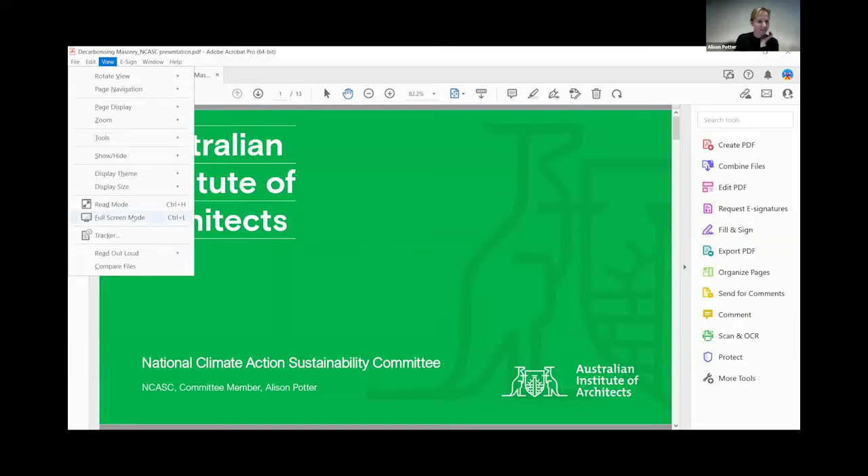Great, excellent. So thanks for the introduction. I'm principal at Hassell Architecture, but I have pretty broad experience across a lot of different sectors, and I'm really passionate about environmentally responsive regenerative design, which has really driven my interest in joining the AIA National Climate Action and Sustainability Committee, but also being involved in a number of other policies, design review panels across Australia, and then into the technical working group, advising into the commercial energy efficiency for 2025.

So for those who don't know, the Climate Action Sustainability Committee actually does a number of different things, working with the national committee, but also working into each of the states' committee chapters. We're keen that there is a very quick transition into improving our built environment. We're looking to support 100% clean, renewable energy futures, and a quick transition of the sector to 100% renewables. We're also looking at identifying ways that our members in the architecture community can promote through their projects circular economy, supply chains and business practices. Really key to our position and role is how we work and collaborate with industry stakeholders, including the ABCB and other members across the whole built environment industry.

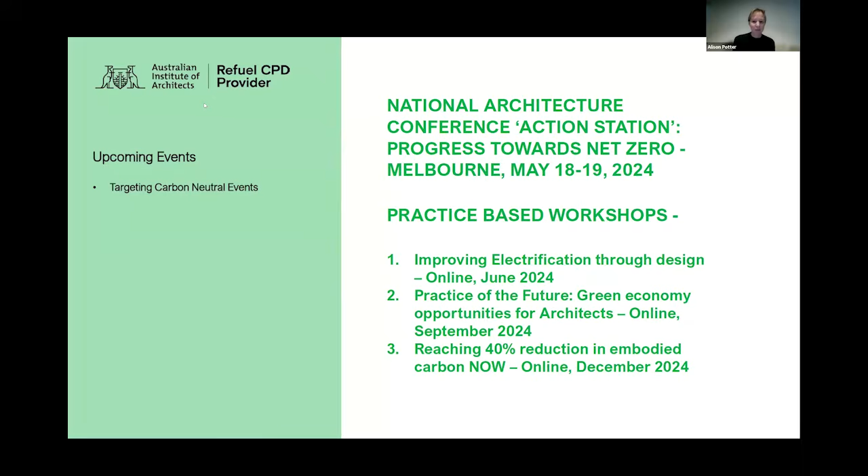Just lastly, we do have a number of webinars that we are putting out to our members. We've got one coming up around improving electrification through design, another one around practice of the future — what does that look like, what does this transition look like for architects in September 2024? And towards the end of the year, we've got an embodied carbon focus session on how we get to these high levels of reduction quickly.

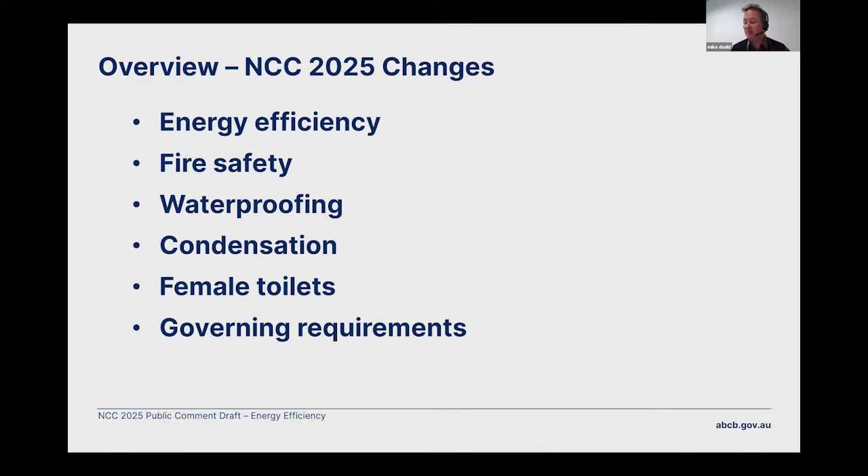Just noting that if adopted, these changes would become part of a revised National Construction Code, which sets the minimum standards for buildings. In other words, the changes would be raising the bar for the worst buildings you can legally build in Australia. So it's important stuff.

I guess the fewer electrons of demand we're adding to the grid by making our buildings more energy efficient, or these buildings coming online potentially producing some of their own power, the overall task of decarbonising the electricity grid for all existing buildings is made that little bit easier with every efficient building we can add to it, especially if it's replacing an inefficient building.

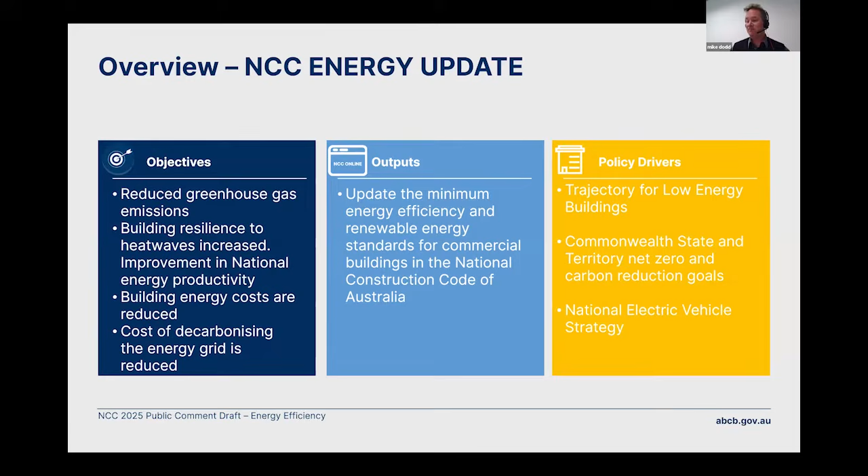Okay, I'm going to move into the methodology of how we came up with these proposals, and the way that we've come up with these new proposals that hopefully some of you had a chance to see, which I'll go into more detail in.

So this is the scope of what we're talking about in terms of commercial buildings, class 3 and 5 to 9 buildings, and the common areas of class 2 buildings. That's apartment buildings' common areas, not the sole occupancy units or apartments themselves, hotels, hostels, offices, schools, essentially all classes of buildings other than residential.

The process that we followed was essentially a large energy modelling exercise where we took buildings that complied with the provisions as they currently stand, but were also reflective of common building designs. And we looked at how we could improve the energy efficiency of those buildings in the key areas that we regulate through the National Construction Code. We did that across all 8 climate zones.

Essentially, we began with a cost-benefit exercise, asking how far can we increase the efficiency of a building while it's still cost-effective. So that's the process. The individual DTS interventions were modelled at a building level.

We also looked, as we were doing this cost-benefit analysis, to make sure that we didn't push so far, even if it was cost-effective, and ended up with only one supplier able to meet the requirements in the NCC. We also had to make sure that what we were proposing would be buildable, that you could actually produce a building able to meet the requirements. And of course, we had to make sure you produced a building that met the other requirements of the National Construction Code, whether it be impacts to do with condensation, fire safety, and structural reliability and the like.

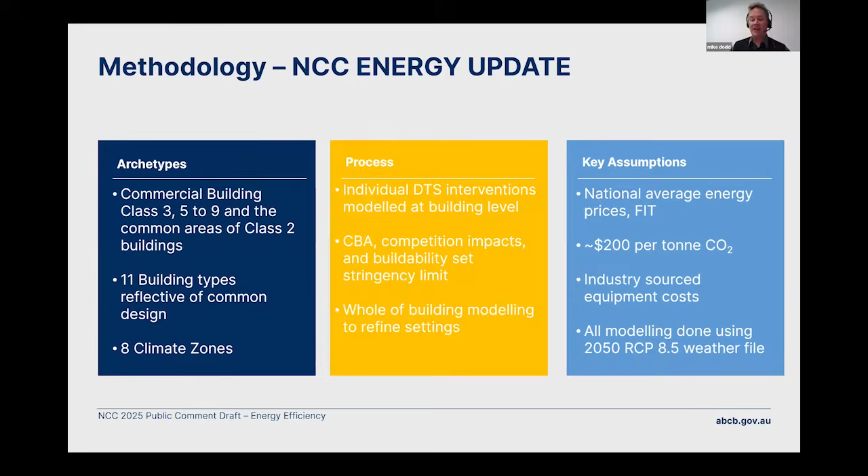So we did a small and a large office, a small and a large hospital, a small and a large retail - so a big box retail and a strip retail - a large hotel, a small hotel or motel, a classroom, and an intermediate size office altogether.

I guess the most difficult one to model is something like a 9B community centre. We used a school for that, but there are many different types of 9B buildings. There's many different types of hotels and hostels, and more modelling is always good, but we were limited in time and scope, and believe the amount we did gave us enough to produce a defensible set of proposals.

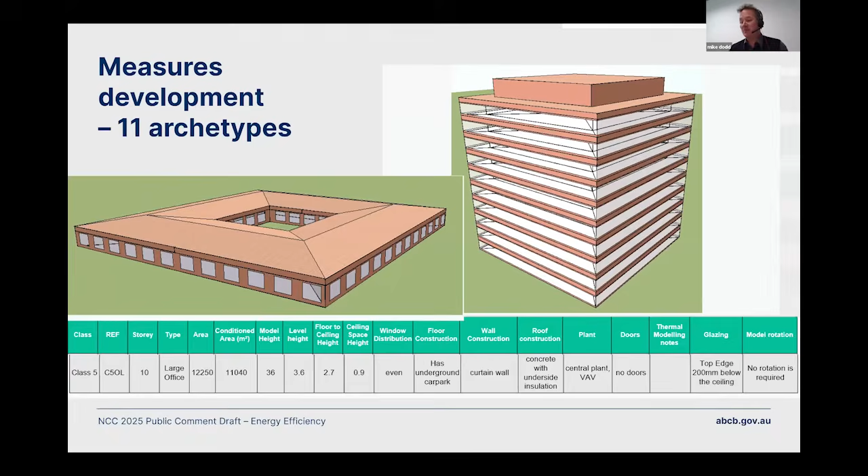In terms of methodology, we investigated three distinct sets of stringency. Option 1 was a minimum cost-effective approach, taking into account buildability and unintended consequences across the code - essentially looking at the 2022 code and how far you can push that while maintaining cost effectiveness.

We then took those measures and added renewable energy systems - on-site PV essentially being the most cost effective - to see what that looked like as a set of provisions. Again, that was done as a cost benefit analysis: how much cost effective PV can you add to a building?

And finally, we looked at a least cost pathway to net zero ready buildings. This wasn't a cost benefit analysis - it was about what we can do to get these buildings to net zero through the national code as a minimum pathway.

We took those options and ran them through a regulation impact assessment. Off the back of that, it was the decision of building ministers and the board that we go to public comment on the net zero ready option. So what you'll see in the code is a net zero ready option for new commercial buildings.

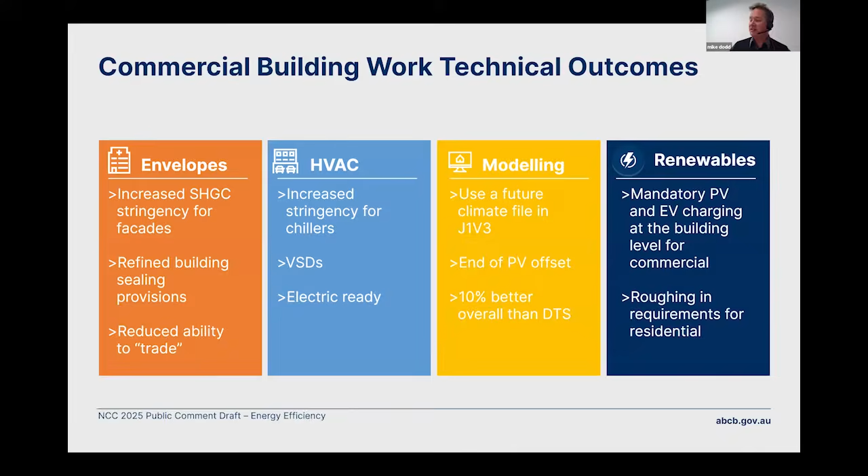I'm going to jump in and go into more detail - but first, I think I've got a slide on.

So I mentioned the regulation impact assessment. It's a mandatory approach that all governments must take when introducing new regulations, to look at the overall benefits. They're relatively substantial with what we're proposing for NCC 2025.

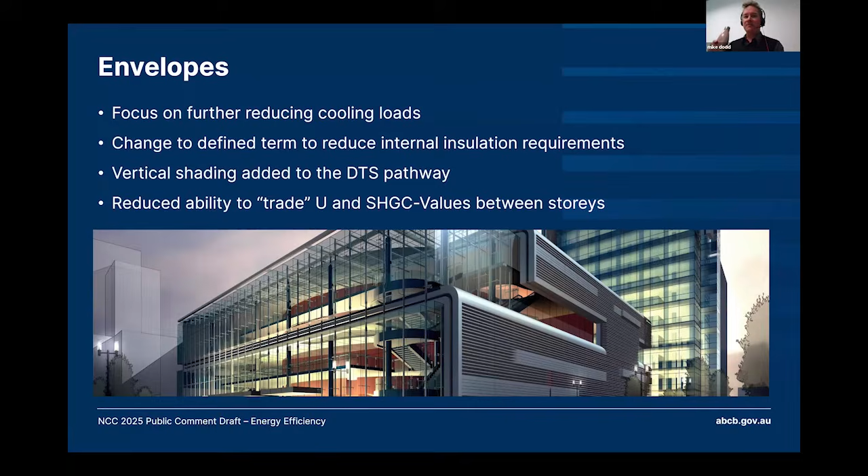One of the comments we got from 2019 was around these uniform across the country solar admittance requirements, and that it doesn't seem to be very responsive to the actual climate that you're in. The response to that was at the time and remains that as you increase energy efficiency, keeping the sun out is important, especially for daytime operating buildings because of cooling loads. But as you get more energy efficient, it becomes more uniform across the entire country.

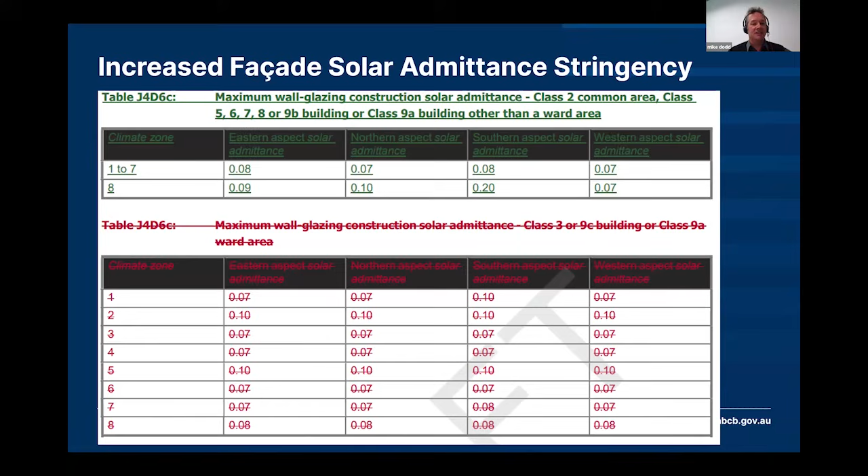And so the DTS becomes blunter the more stringent it becomes. There's still room for nuance within design, especially if you're following a verification method, and we still retain that ability to trade.

Okay, so I mentioned before, at the moment, we're proposing a change to the definition of envelope. And this is a key thing that we found that in the 2019 changes, or even before that, you're required to insulate between a conditioned and unconditioned space internally, even if the unconditioned space adjacent to the conditioned space had its temperature determined by the building's air conditioning system, or wasn't really affected by external ambient conditions.

This meant that we were requiring people to install insulation where it wasn't necessary, wasn't having any effect, and they were also in some cases able to use that internal insulation to trade with the external insulation and reduce the external part of the facades. So we found that as we're making the building more efficient overall, it was important to only allow that trading when insulation was necessary within the building.

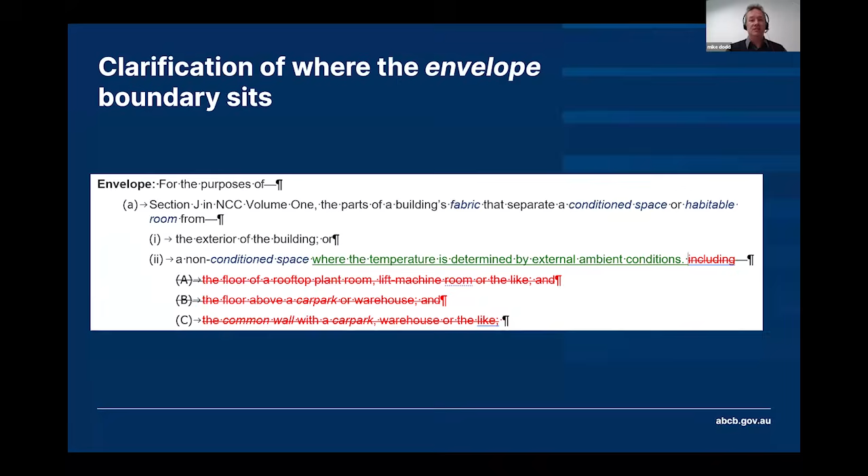Right, so, and I'll talk about those case studies and when they should become available, hopefully in the coming weeks.

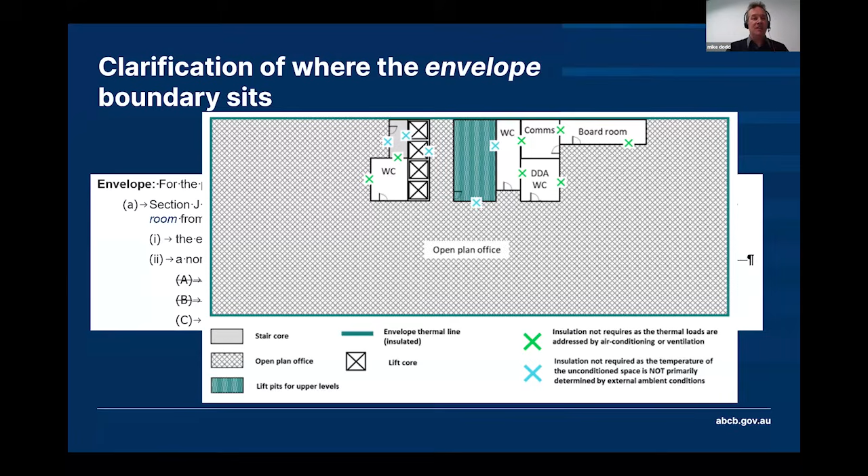Okay, staying with facades, I mentioned we have introduced vertical shading as a deemed to satisfy. So presently, if you have a vertical shade on your building, you can claim it as a device if it meets the requirement as a shading device, but it doesn't give you necessarily the benefit that you might expect from a vertical shading projection. So this is DTS, and currently you'd have to do a performance solution, such as a J1V3, to get the full benefit from your vertical shading.

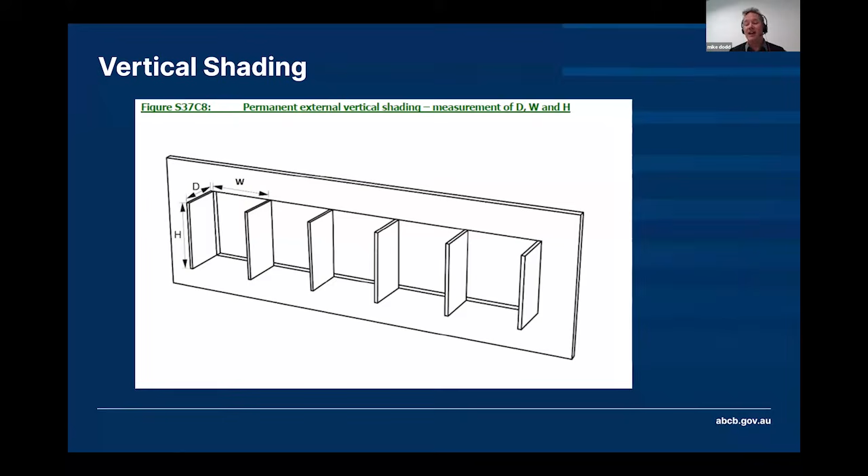But introducing this as an option, we're hoping to encourage vertical shading, that especially on a western aspect or an eastern aspect could be very effective in stopping solar gain coming into a building.

And finally, this idea of the decreased ability to trade within the building envelope. So currently, you can trade the total system U value of your facade between different stories. So between the first story and the 10th story, you could have a smaller amount of glazing on a lower story and a higher amount of glazing on an upper story.

Now, if you were doing that within a J1V3 or the NABERS pathway, for example, within the code, you'd also have to make sure that that space met comfort requirements, such as using the predicted mean vote. From a deemed to satisfy pathway, there isn't that comfort requirement backup, which essentially is serving as an envelope protection to protect occupants.

And so we're proposing to remove that ability to trade between different stories. You can still trade between different aspects on the same story, and you can still trade within a story between glazing in terms of meeting the overall requirement, so you can have within a story more glazing in one section and less in another, as long as it meets the overall total system U value. But yes, not between different stories.

And I'm interested in your thoughts on this. It does limit design potentially. I guess the question is whether you feel it's a warranted change in terms of protection of the building occupants. Yes, and it's carried across both method 1 and method 2. So yeah, you can still trade between different aspects, but only within the same story, as proposed.

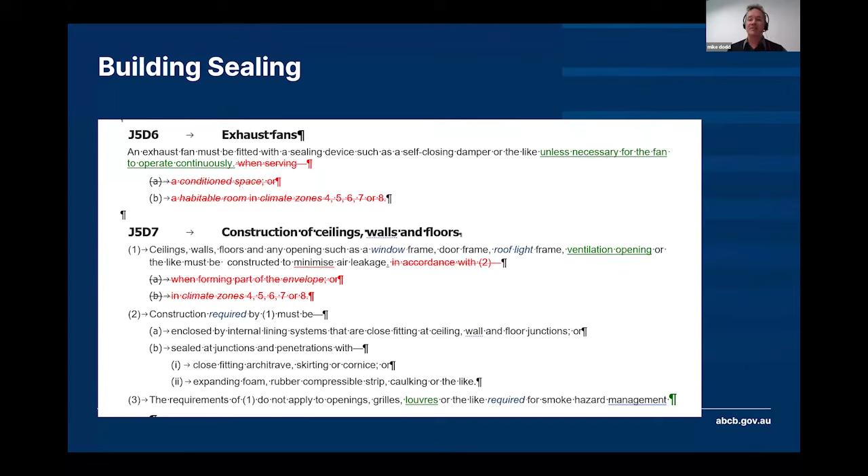We've also made some minor changes through Part J5 to the building sealing provisions. These still remain qualitative in terms of application. The building envelope still needs to be sealed up, but there's some changes there in terms of wording to try and clarify when sealing is or isn't required. I didn't want to go into a great deal of detail. These are qualitative changes trying to improve the clarity of the NCC. So they're changes for building envelopes.

I'm just going to go through some of the other key changes in the time I have remaining, and then I'll hopefully open up to questions.

So I mentioned the verification methods and the performance requirement have also undergone some changes. So J1P1 is the energy efficiency performance requirement for commercial buildings. This was quantified in 2019. It has a kilojoules of energy per square meter per hour of operation target that was introduced in 2019 to give you, I guess, a pure performance solution possibility within the NCC. The stringency of these figures has been increased, and a carbon metric has been added to the performance requirement, and it reflects a near zero energy performance.

It's not exactly at zero because we know that the grid will not be fully decarbonized for a number of years, and actually getting all building classifications to a net zero target is going to be difficult depending on the building form, its typology, its size, and so forth. But it does reflect a near net zero level of performance.

We've updated the NABERS pathway, J1V1, to reflect that. So there's a higher NABERS commitment agreement level of 6 stars that varies between building types. Thank you, Erica. So I think it's 6 stars for office buildings and lower for other building classifications. So class 3s, class 6s, and class 2 common areas can use the NABERS pathway presently.

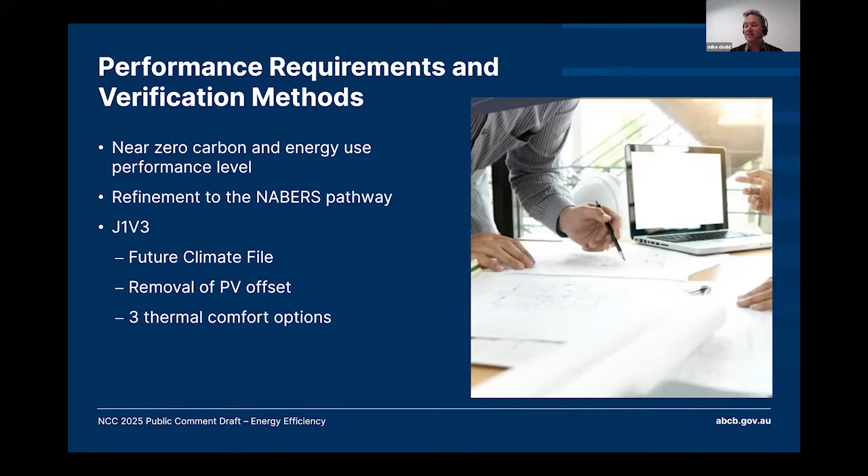And I mentioned upfront the changes to the J1V3 pathway in terms of future climate, especially. The Green Star pathway remains unchanged, and the J1V4 pathway in terms of building sealing verification using a blower door test remains unchanged. There is a small change to J1V5 verification using a reference building for class 2 apartment buildings, so occupancy units. We've extended the requirement to meet the cooling load to climate zone 6 and to meet the heating load cap in climate zone 2. So a slight expansion of the requirements in those climate zones.

I touched high level on the air conditioning and electric ready requirements earlier on in terms of the key headline changes. There's a new metric for chillers we're proposing to introduce called a climate specific part load value. The main intent of this change is to make chiller selection more fit for purpose, both in terms of the technology that you use and the load and the sizing of that equipment. So it's trying to drive you towards good design as best as we can through the National Construction Code.

Fans and pumps will require variable speed operation. It's incredibly cost effective in most cases to introduce variable speed operation, and so you'll see that as a requirement. There's other changes for HVAC equipment to do with how controls are specified, and some changes to do with economy cycles in terms of when they are going to be required going forward.

But perhaps one of the biggest changes overall, not just for air conditioning equipment, relates to future electrification. If a building is dual fuel in terms of using gas for its space heating or heated water, either for sanitary domestic hot water use, or for hydronic heating, or for heating of pool and spa water, it will be required to make it easier or more straightforward for that building to replace that gas equipment with electric equipment in the future.

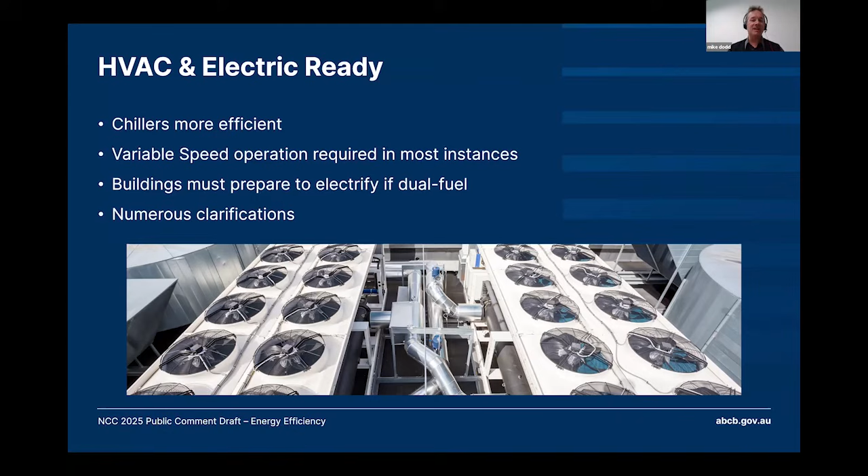That means that the building needs to have physical space in terms of where that equipment will go. It needs to have electrical capacity in terms of its supply from the grid. It needs to have switchboard space so that that equipment can be plugged into the building's main switchboard or its various distribution boards. And specifically for the heated hot water loop, it needs to have its hot water loops designed to be able to use 50-degree Celsius water, which is not the optimum, but it's a temperature that works well with heat pump technology. So there's a number of things that your building must do if it uses gas upfront to make sure that it can electrify in the future.

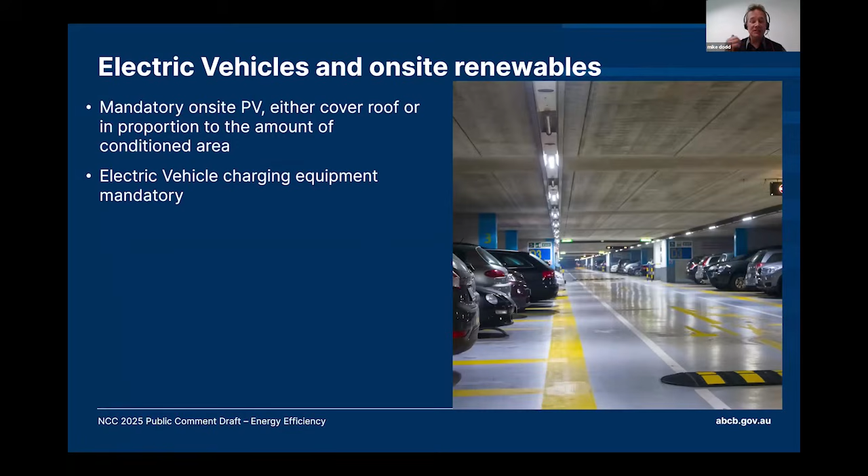Okay, another key change that I'm going to go through, electric vehicles and on-site renewables. I'll start with the PV provisions. So high level, we're proposing that all new commercial buildings, unless they're heavily shaded or have other exemptions, install solar PV if they're following the deemed to satisfy pathway, and all buildings have electric vehicle charging. I guess that's the headline, as I mentioned before. So what does that look like?

So that requirement is built into the performance requirement. So in terms of J1P1, as I mentioned before, it's a net target. So it will be inclusive of on-site PV. So those quite tight greenhouse gas emission and kilojoules per square meter targets can be done inclusive of on-site PV. So we're looking at a building which is near zero, both in terms of carbon of its energy sources and energy use, producing and using as much energy on site as it's drawing from the grid.

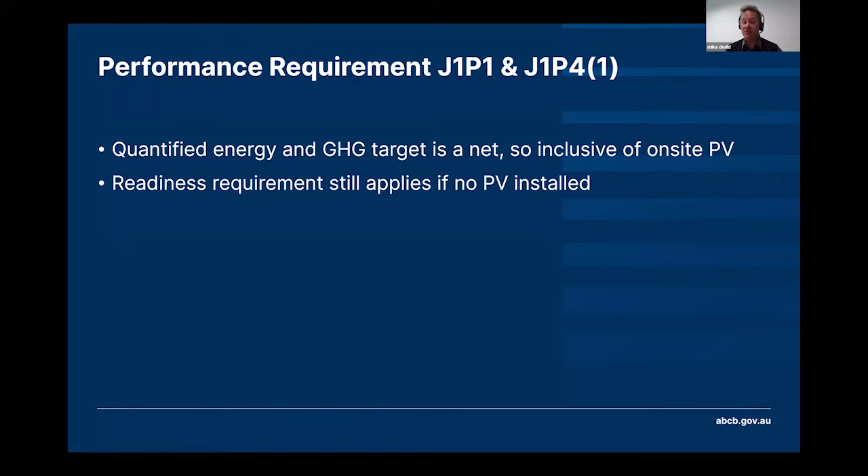And also J1P4 has the readiness requirement if PV is not installed, but it is clarified that if you do install PV, you don't need to make your building PV ready going forward. So in J9D5, which is currently about readiness for PV, we've put in 2 new pathways around on-site solar PV.

The first is a peak system output of watts per square meter of conditioned space. So if you have a small amount of conditioned space in your building, then you'll need a small amount of solar, or you have to install PV across the available roof space. I'll go through what available means in just a sec.

If as part of the electrification or dual fuel requirements, gas is installed on site, these amounts are higher to better offset the use of gas, which is more difficult to offset in terms of its carbon emissions than electrical equipment, both because the grid is decarbonising, and because you have to export that energy to a greater extent than it's being used on site when netting it out.

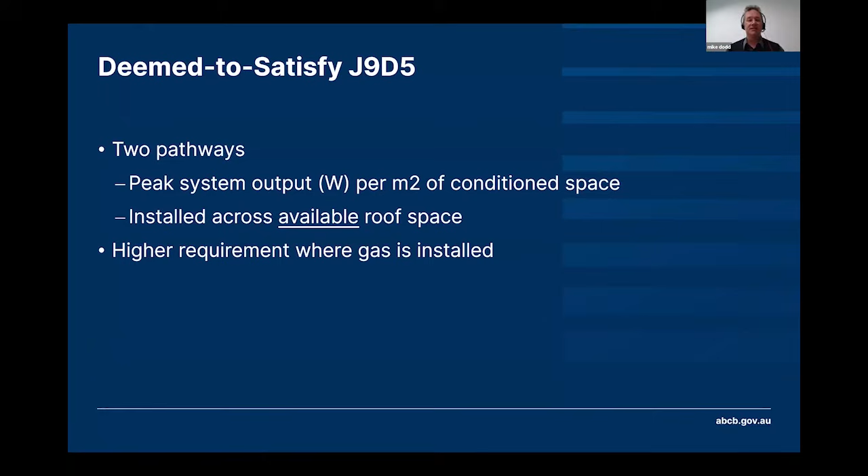Okay, so available excludes quite a lot of things: areas shaded for more than 10% of daylight hours, areas with a pitch greater than 45 degrees, areas used for terrace or roof gardens, car parks, skylights or the like, areas used for plant and equipment, and areas reserved for plant and equipment in the future, above exhaust airflows, heat rejection equipment, or simply where it's deemed impractical for other reasons, such as being too close to the edge or needing to be trafficable.

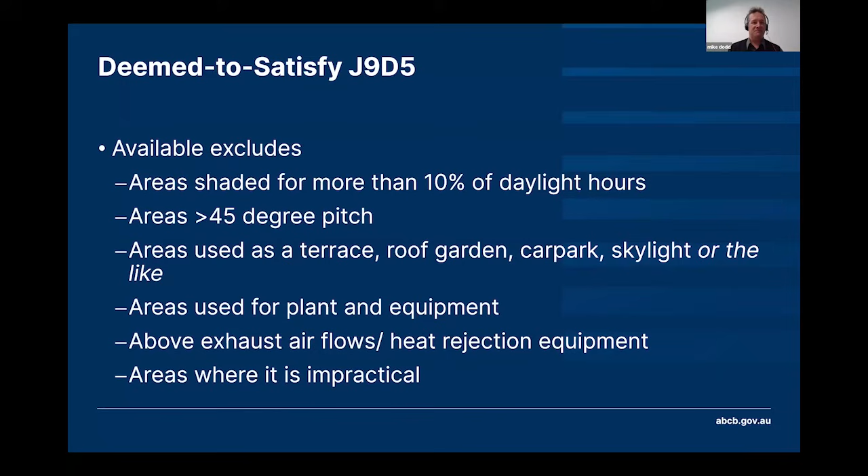So if you have a small amount of roof space, the amount of solar required will be quite low as well. So the headline is that solar is required, but maybe the subheading is maybe not as much as you might think.

In terms of the requirement for EV charging, it's in J9D4. It's requirements for type 2, 7 kilowatt chargers. If you have more than 40 car parking spaces in car parks or car parking areas, that would need to be in 10% of spaces. So say you've got a building with 100 car parking spaces in a class 5 office, 10 of those would need to have EV chargers installed.

It's higher in a class 3, 7B, 8 or 9 building. Also, 10% of your car parks which are required to be accessible must also have an electric vehicle charger. If you have 40 or fewer car parking spaces, the code actually says less - we have arguments in here about what the right thing to say is, but we all understand the meaning - you must install at least one charger in your building.

So that's the EV requirements. As I said, it's type 2. There's also a quantified performance requirement for electric vehicle charging, which is that your electric vehicle charging meets 20% of the daily driving needs of the building occupants.

So if you don't want to do 7 kilowatt chargers, maybe you've got a retail precinct and you want to do faster charging, as long as you can show that you're meeting that 20% of daily driving needs as predicted, you can do that instead of following the deemed-to-satisfy, as a performance solution. There are also some other requirements about where you place your chargers, focusing on where you place your distribution boards, or if you don't want to use distribution boards but want to use bus duct, you can do that instead.

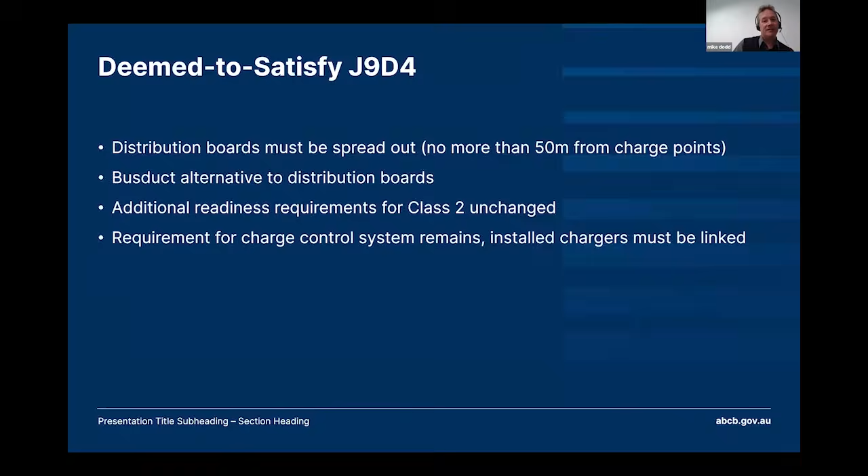Okay, so pause there for questions. I'll stop sharing my screen. I'm not sure how we've been going in the chat - they came to a rather abrupt halt. I can see there's maybe some questions in the chat, or where would we like to begin? I'll throw back to you, Michael.

Oh yeah, thanks Mike, that was really good. We've had a few questions come through on the verification performance section. If I just read one out - it's got a lot of the coding and letters and numbers in there, but you'll know what I'm talking about. Let's go for the first one.

J1V1, energy ref J4D6: Can you explain if the maximum U value of 5.8 for glazing, including display glazing, is per floor elevation or maximum for a single window? It's maximum for a single window.

This is a really good question, and it's one that came up last week. So essentially, we're putting a backstop in your total U value calculations for your facade. So you can trade between - well, it's more limited than it used to be - but the trading element in terms of the total system U value now has a backstop of 5.8 in it. So you cannot have glazing in there which is greater than that.

All right, let's try another one here. This is quite a long one. Again, this is related to J1V3.